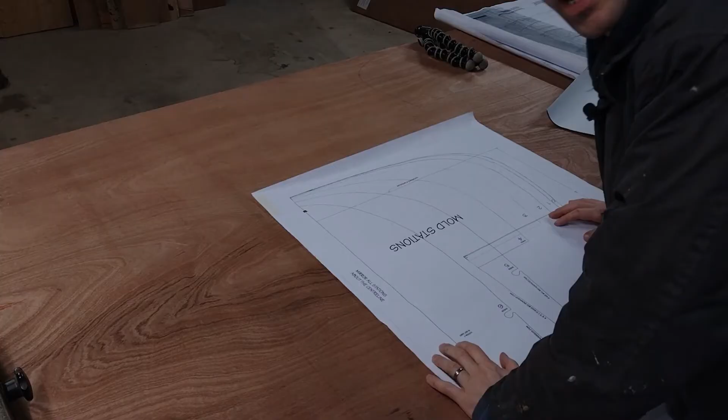Now I'm going to talk you through the process of drawing out one of these mould stations onto the plywood. So the first step is to try and work out where you're going to draw it. I'm trying to tessellate these as close as possible. So I've got stations 0, 1, 2 and I need to do station 3. So I think my best bet is to, I don't know if you can see the edge of this previous one here, is to fit it into this area as much as I can.

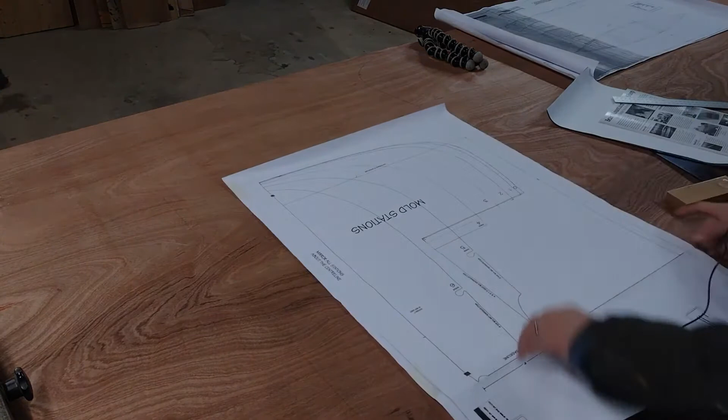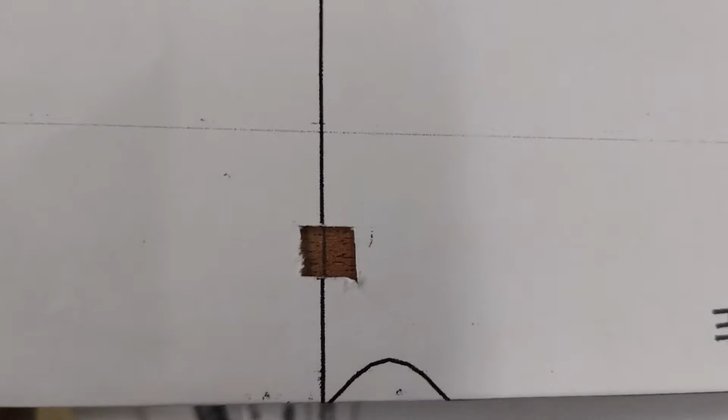So I line up the piece of paper, the template. I want to leave about 1 centimetre between this and the previous one where possible. Okay, that's good. So then I mark roughly where the centre line is. And then I'll put a cross there to match up with that window for the vertical location. And then using a set square and a straight edge, draw that centre line into the boards.

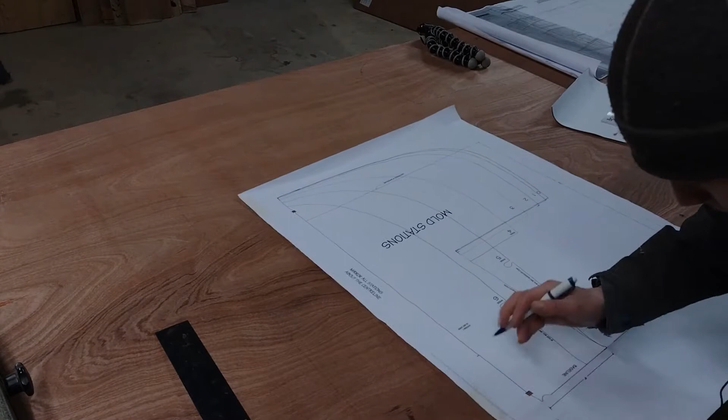Now line up the centre line again with the small cross that I made underneath this small window. And line up the centre line at the top as well, where there's another small window cut in the paper, just here. Once these are both perfectly lined up, then I use masking tape to hold it in place.

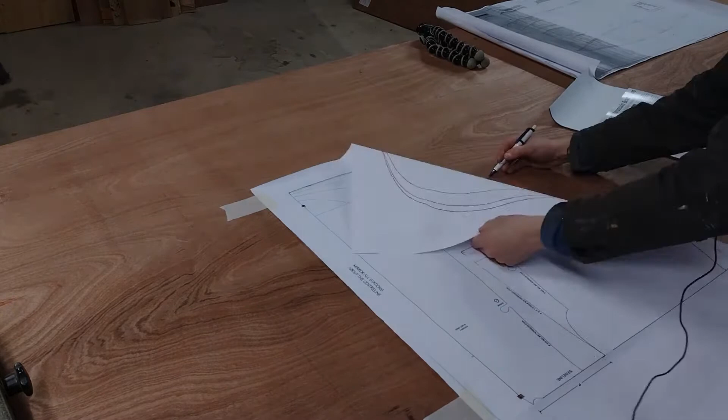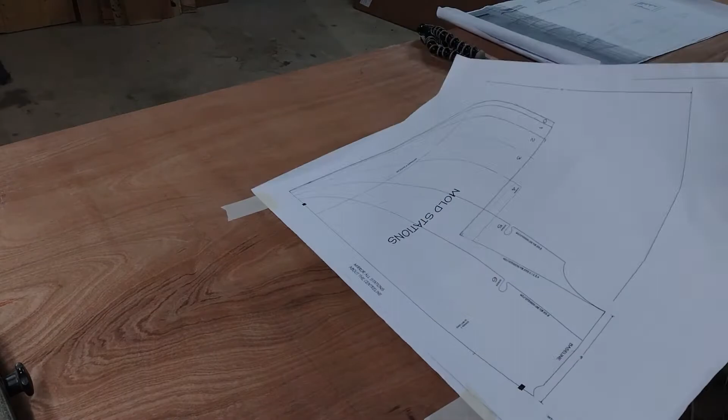Now at this stage I use 2 sheets of carbon paper, one facing up, one facing down. And that allows the line to be transferred onto the plywood but also onto the back of this plan, so that I can do the reverse in symmetry, in mirror image, to get the other side. Use my straight edge to join up the marks I've made for the straight lines.

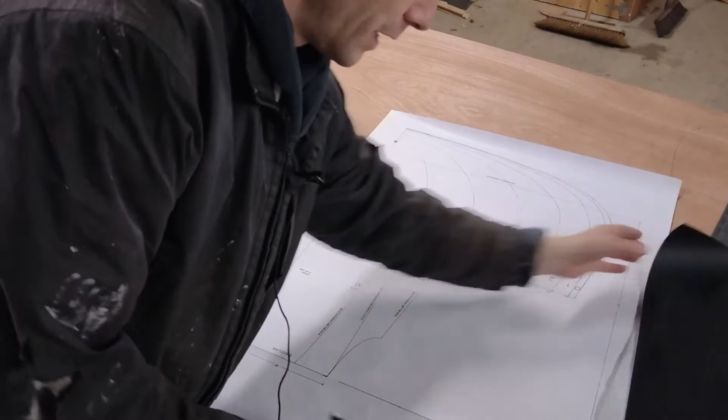The second half is a little bit simpler because you don't need to trace it onto the back of the template. So I now have this line drawn, which is mould station 3. Again, I line it up. I have to line up the base line and the centre line with the windows, and then tape it down again.